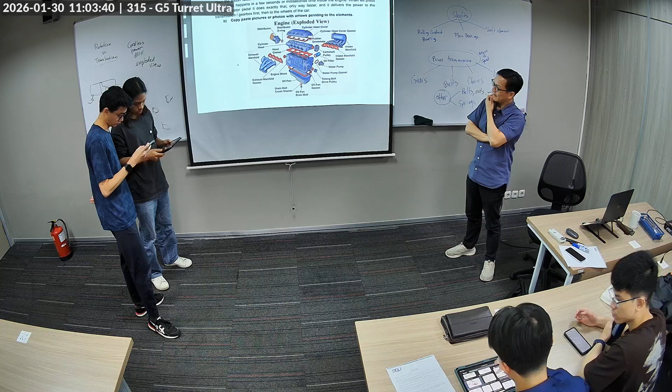What about the bearings? Bearings. What type of bearing is on the crankshaft? Rolling contact bearing. Because it's going to be a plain bearing? No, the rolling contact. No, I'm correcting you. So it is the plain bearing. The reason is that if you have these rolling contact bearings, the engine is very high shock. Okay, it's going to damage the bearing in no time.

So what they have is a plain bearing, but it's cushioned with oil. So the reason your engine oil is important is not just to lubricate friction, but actually to support this crankshaft, so it's actually floating on oil. Okay, so this is a special type of bearing called a hydrodynamic bearing.

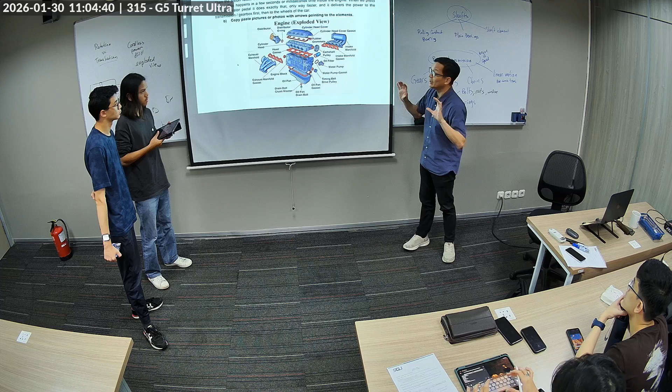You actually create pressure, and in this gap between the shaft and the bearing, you're actually floating on oil. So you keep pressurizing this crankshaft bearing, the gap. The gap is filled with pressurized oil. And so that's why oil is the blood of your engine.

Like once the oil pressure drops, the shaft suddenly makes metal-to-metal contact. And it'll be done in no time. Like in less than 1 minute, it'll be done. Okay, that's good enough. Thank you. Let's look at another one.

Brilliant. Okay, go ahead.

Okay, cordless drill. Okay, highlight the machine elements. Okay, so basically, of course, there's a shaft. Yeah. Connecting the motor and stuff, and then of course there's a unit. You can explain it to the class. Okay, so just the machine element itself. The shaft, the motor itself, which will rotate the shaft, and there's the bearing, the ball bearing, basically over here. I think you can see. Right, there's the ball bearing.

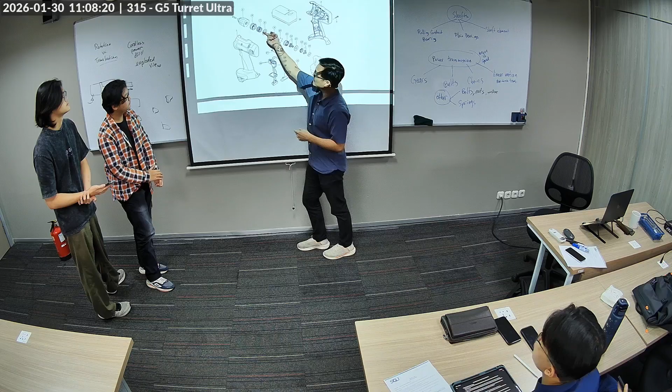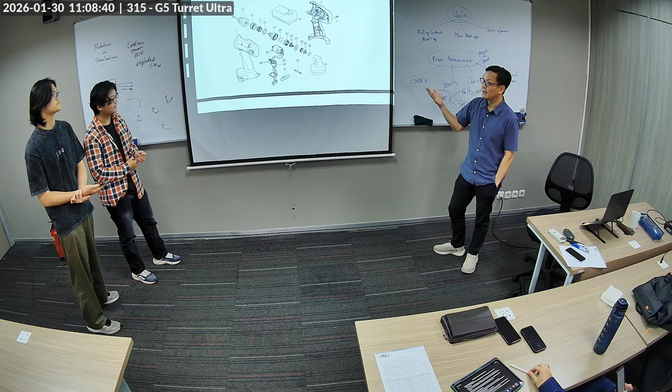So, bearings. The bearings support both. The motor has bearings, but this entire assembly is also, every time you have a rotation, you'll have the bearing there. Okay. I didn't talk about this, but many times the power transmission is actually a reducer, meaning that the ratio actually reduces the RPM. You mentioned that, right? It slowed down the RPM.

So anybody knows why the gears are usually meant to slow it down? Because you want torque, right? And electric motors are generally high RPM and low torque. That's just the nature of electrical motors. Gasoline engines are relatively lower RPM and higher torque. But motors are high RPM.

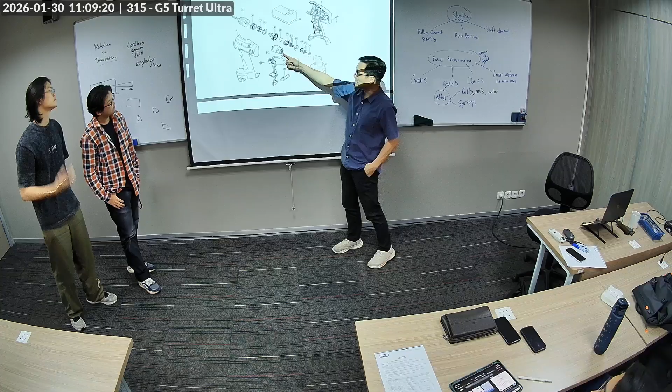Many of these motors go up to like easily 20,000 RPM, which is very high RPM. But it doesn't have torque. So most of the gear or belt situations for electric motors will be a reduction type. So like a 20 to 1. So 20 turns here is 1 turn here. So 20 to 1 ratio, or even 50 to 1, if this is a really high RPM. Okay? All right, thank you.

Okay. Let's do one more. No volunteers, I guess. Nicholas? Which Nicholas? Nicholas? There is the Nicholas. Nicholas Lee? You are Nicholas. Okay.

Scissor jack. Okay. Okay, go ahead. Well, just highlight the machine element here and how it kind of works together. Okay, guys, pay attention. Everybody knows what this is, right? Yep. Yeah. Emergency scissor jack. Lift up your arm. Go ahead. There is... Can you speak louder? Yeah.

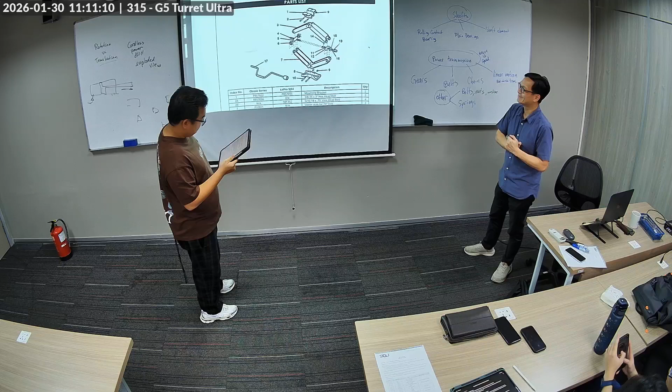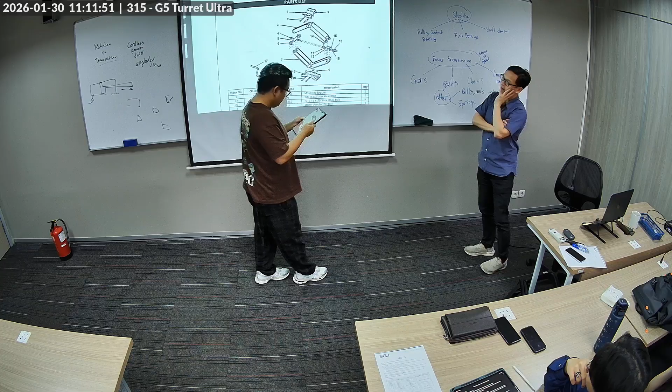Okay, I'm gonna explain how the machine element works. Okay. First element is the crank handle. Crank handle, this one. Okay. The user turns this crank handle to provide torque. And the second element is the power screw. Power screw, this one. Okay. This long threaded rod is the power screw.

Yes. Do you know why they call it a power screw? Okay. It's usually used not to tighten something like bolts. Okay, bolts, they clamp things. This one actually tries to multiply the torque into a very significant axial load, right? So what happens when you turn this? The crank turns this shaft, right? Yeah. What happens? Lift the... But before it lifts, what does it move?

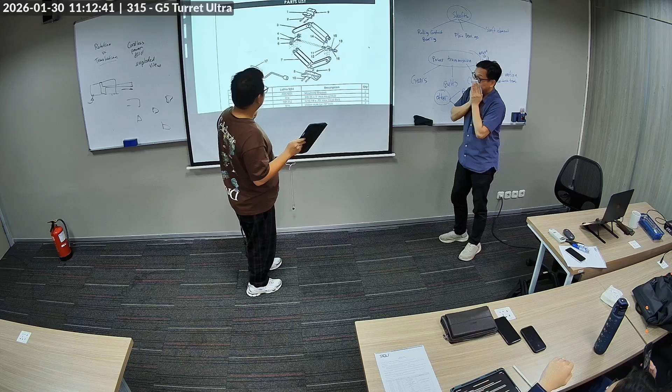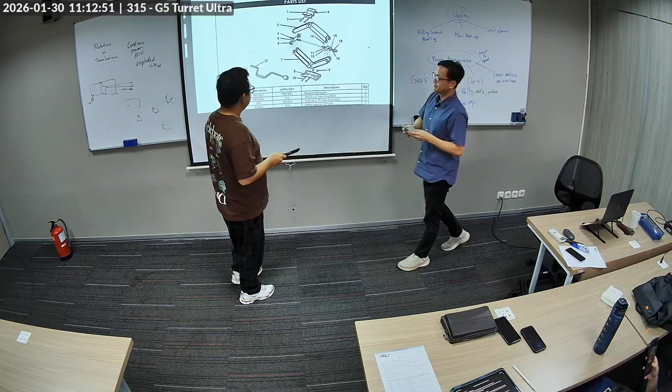There is the thread, right? And these are the nuts. Okay? So what happens to these two nuts when you turn it? It'll move, right? Okay? So this power screw, when you turn it, this thing moves here and this thing moves here. So it's an opposite thread. One is left-handed, one is right-handed. So if you turn it, they go in opposite ways. So there is a change in thread in the middle. And then these two come closer, and as a result, it goes up.

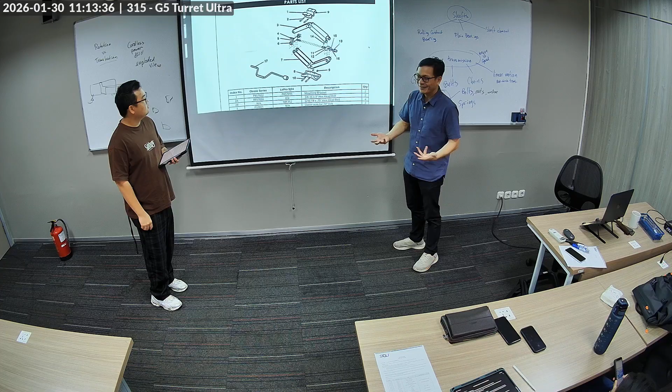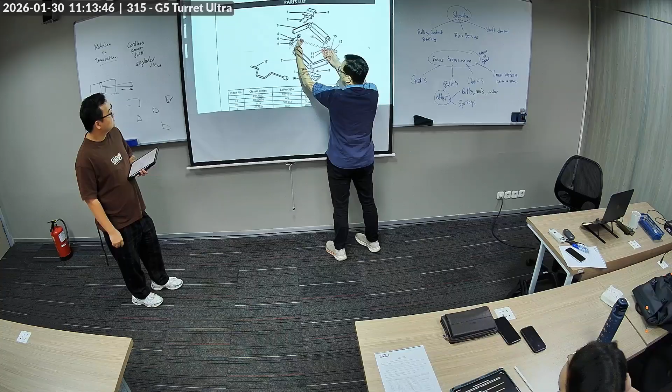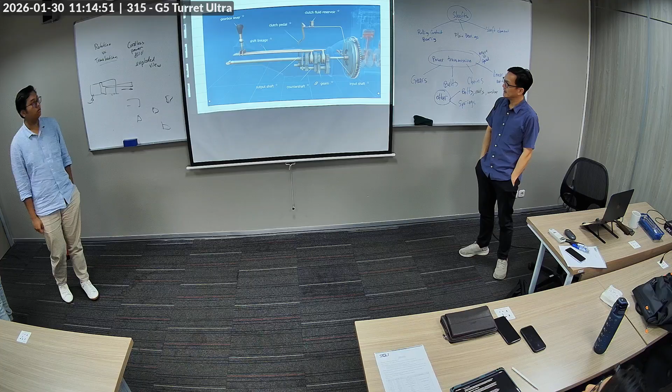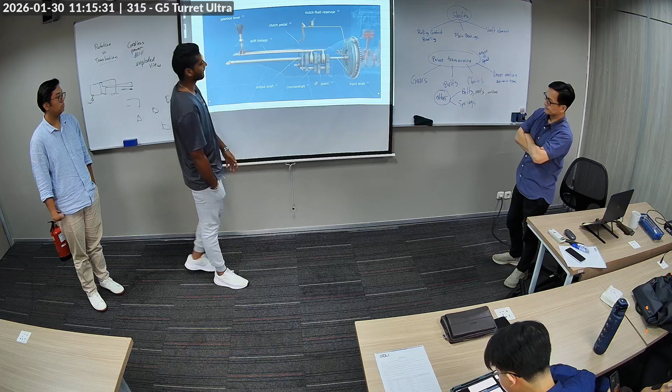Okay, guys, so we're gonna talk about the manual transmission. So the machine elements we use in the gearbox are shafts, bearings, and gears. So, as you can see here, this is the shaft, and it contains all the gears, and it is being held with bearings on each side, and inside also we have bearings. So most of the time here we have ball bearings, and inside we have needle roller bearings, because this takes a lot of torque. So each bearing carries its own purpose. Okay. You have anything else? Yep.

So here, you can see inside we have the needle bearings, and the ball bearings usually will be on each end of it, but most of the gears carry needle bearings. Needle bearings are more compact because the rolling elements are tiny, like needles, right? Because they are captured inside either the collar or the floating gears, right? So you don't have much space, otherwise the gears will be too big.

Yeah. So as you can see here, most of the gears are helical, because in the transmission of power, if you have straight gears, it will be harder and it will eat the teeth, I guess you can say. It's noisy. Yeah, it's noisy. Also, you can see the only gear which is straight is the reverse gear, and all the others are helical gears. So helical gears are basically like a waveform, so they slide into each other perfectly. And in between, you're gonna have your synchromesh, which helps in the transition from one gear to another. All right, excellent. Thank you.

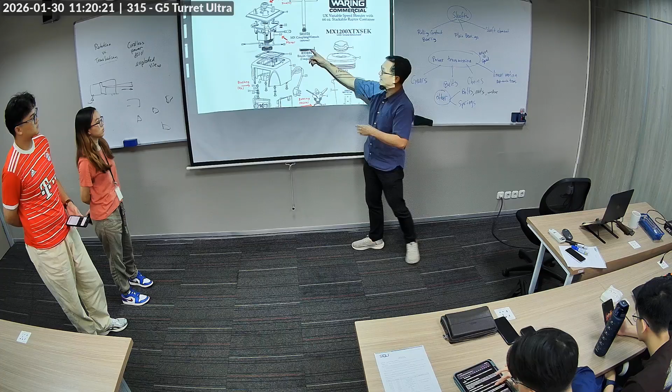So there are two brushes contacting the rotor, and it is always in contact. That's why you have the spring here. Okay. So we'll learn more about springs later on. Okay. Thank you.

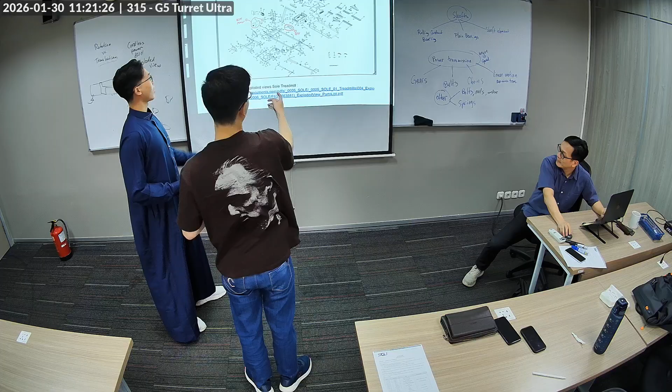Wow. Yeah, this is very complicated. What is this? Treadmill. Oh, treadmill. Exploded. This is the new one, this is the old one. It's a comparison between the old and the new. Do you have a less complicated one? Well, the less complicated one we have only explains the outer part, not the anatomy inside. Okay. So another one. Oh, this is the old version.

It's a video. Okay. Do you want to do the video instead? The video is actually not really about the mechanisms, because I just found one that's closely related to that, like a belt. Okay. This is Lego. Yeah, like this. 1, 2, 3, 4, 5. Okay. Give it a shot.

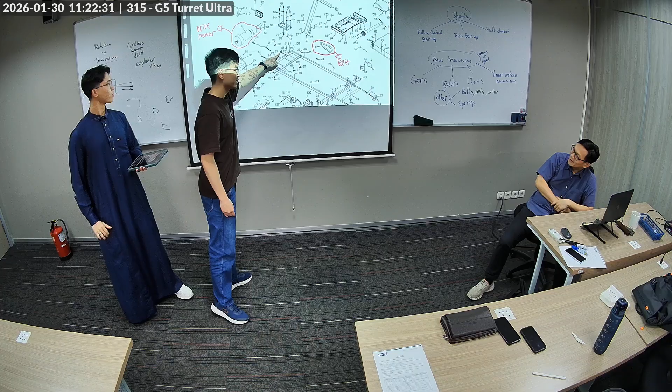Okay, so first we can see there's a power outlet. That's the source of the power, the electrical energy. Present it to the class also. This one, number 82. And we have the most important components, the drive motor and also the belt, where the drive motor helps deliver power on how fast you're going, and the speed is also controlled by the belt too.

For the shaft, we can't really find the shaft on the newer models, but from the older models, next page, yeah, the shaft is around here. We have the link shaft and the shaft bushing. Do I need to explain how this correlates? Okay. So is this bushing for the main shaft? So for the shaft here, we have the front and the rear one. It's a working shaft.

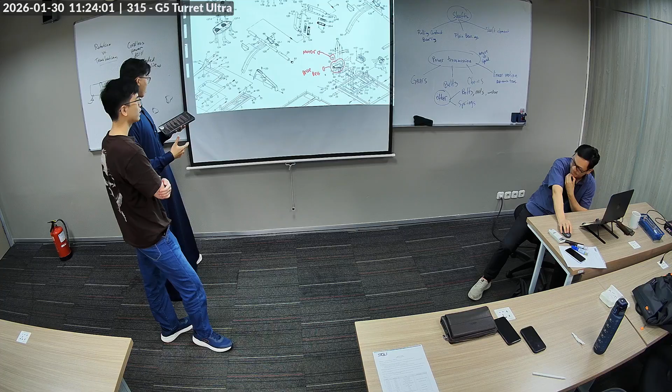And they're all ball bearings, right? Not bushings. Yeah, because of movement. Yeah, a lot of load and high RPM. Yes. And also here, we have rollers for lateral tension. Running belt, you know. Okay. Is that it?

I'm sorry if it's a huge scope. I can't really find the anatomy of the real treadmill. What I can find is the outside one. You know, the skin. Yeah, this is the inside one. If you want the simple one, it's only the outside part. That's fine. Okay, thank you guys.

Thank you. Okay, the girls, you want to come up? What's your name? Angel. Angelica.

Okay. Go ahead. Just highlight the machine element here. In office chair is mostly the cylinder. Okay. So when you activate the lever, like a valve opens. Real life demonstration. Yeah.

So when there's weight and you activate the lever, there's like a valve open, and the gas is compressed. But when the weight is removed and the lever is activated, the compressed gas pushes the piston upwards. So it goes up. Okay. What machine element is involved in this mechanism?

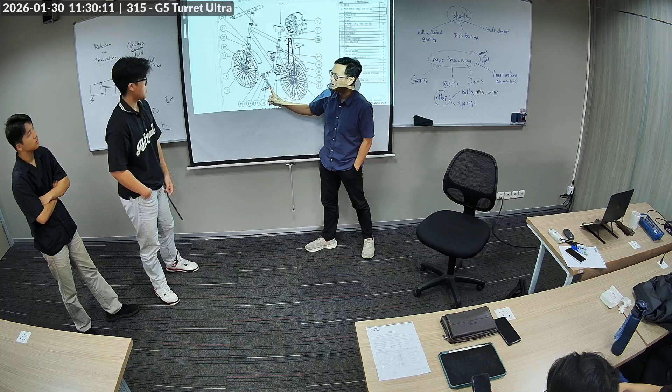Not the shaft. But you mentioned the pedal. This is also a rotating shaft, right? It's also on bearing. So quite a bit. You can also argue that the clamping brakes have a tiny shaft where it rotates, right? Or the one that pulls and then clamps from the left and right. It's also on a shaft. Okay, so you see there are a lot of things going on actually. Okay, thank you.

Who else? What's your name? Arif. Okay, come on guys. Okay, what are you doing? Where's the picture? All the way down? The compressor? Which part do you want to discuss? Which picture do you want me to show? This one? Yes. Okay. Just the refrigerator as a whole.

Okay. Go ahead. So the power source of the refrigerator is electrical power, basically AC supply. The electrical energy powers the electric motor that produces the rotational motion, at the motor shaft inside. The motor is where? Where is the motor? What's inside the compressor? It's a motor inside, okay?

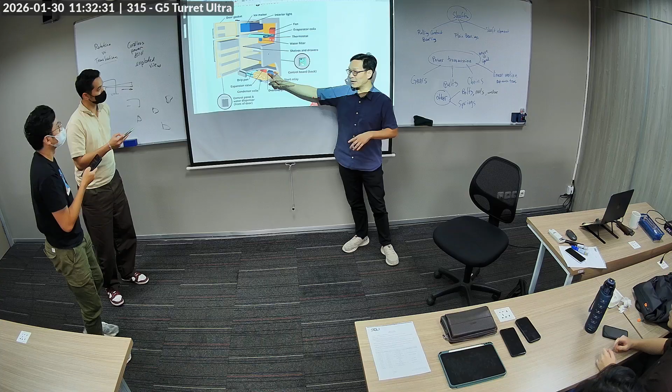A compressor is basically a pump. It pumps refrigerant, freon, we call it, right? Okay? So definitely there are bearings in there, holding the motor shaft. Okay, what else? What other machine elements? Let me show you the cutout of a compressor. So if you look at these, you got the motors. It's not clear enough.

Okay, so what happens is that this is the motor, and then there are usually blades that spin, suck in the refrigerant, and pump it out in the discharge. So the job of the compressor is just to develop high pressure, and it will result in high temperature refrigerant. It goes into the condenser, cools down, and then it goes into your refrigerator. Okay?

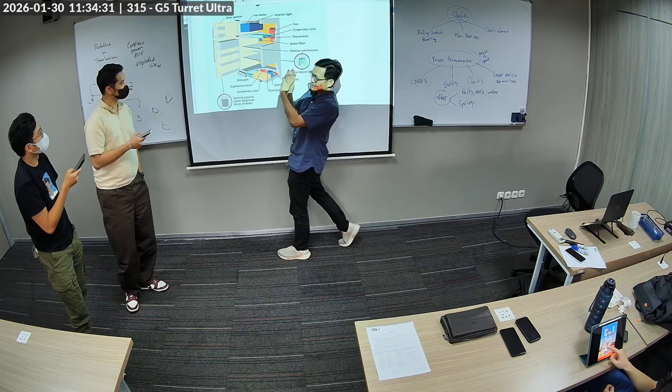Okay, so the compressor. What else? Where are the other machine elements? Do you have shafts other than the one in the compressor? Where? The hinge, right? The door hinge, just like that door. You have a pin or a shaft, it rotates. This door is pretty heavy once you put all the food on the door. So, similar to your door here, it's not that light, it's pretty heavy.

Okay, anything else? The drawers probably don't have bearings, it's probably just sliding plastic. Okay. All right, cool. Thank you. Anyone else? No one? Okay.

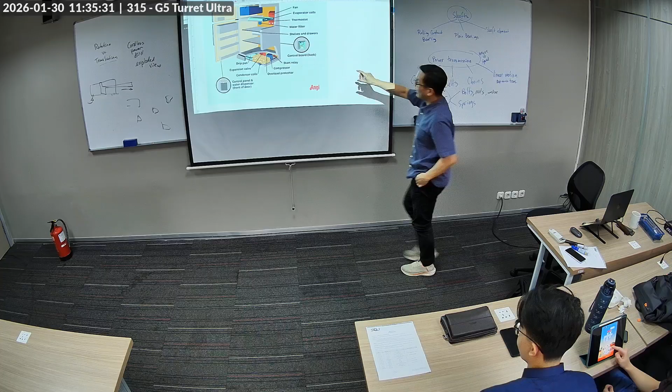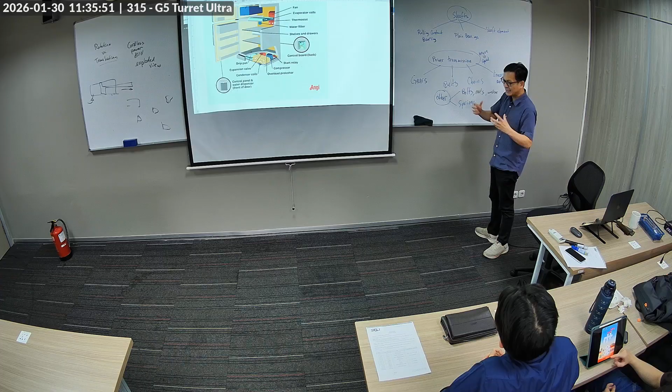So there are a lot of machine elements without you realizing it actually. And a lot of these machine elements we don't see because they are on the inside, but they're the ones who make your machines work. And just remember the main categories that we will go through. You have the shaft supported by the bearings, whether that's rolling contact or plain bearings, or other shaft elements that might be needed to work there. We'll discuss that, like torque transfer.

And then you have the power transmission, the torque versus speed. You've got the gears, belts, and chains. You can also convert rotation to linear, and that's also useful. Okay, so we'll kick off week 2 with discussing shafts and their components.

Okay, that should do it for the day. Thanks for your participation. Everybody submitted that. Oh, one more. This semester, I'm trying to experiment with many AI tools to assist your learning. So I have one more assignment between now and next week. I want you to use Gemini Live and actually look at a product in real life.

So for example, can I borrow your bottle? Okay. So if you go to Gemini, I don't know whether this exists in ChatGPT, but you can click on the lower right-hand corner. So if you press on that, and then you turn on your video. So if I do this: Gemini, what is this product? "A blue water bottle, possibly a reusable one with measurements and maybe a carrying strap." Okay, so it reads the measurement.